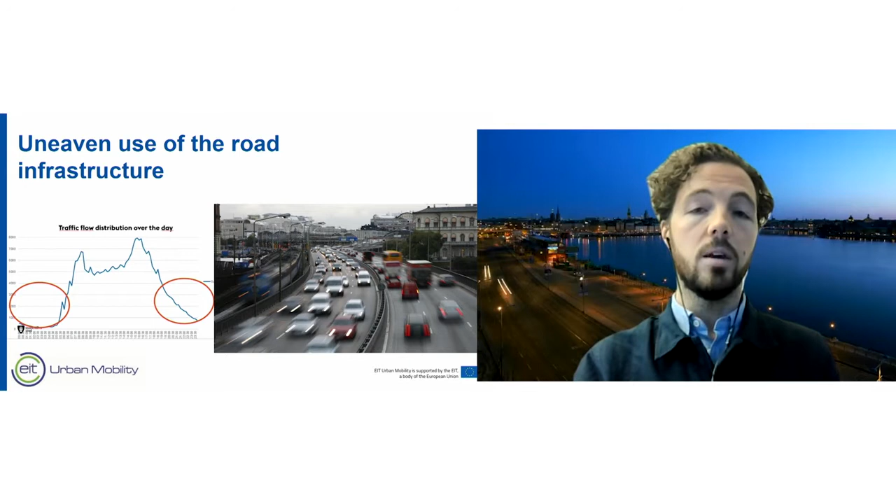So if we can find solutions to move part of the traffic from the peak to the off-peak, that is a very efficient way of using the existing infrastructure in our city.

And of course, as we've seen in projects and why we're working with this, is that we can achieve less congestion during the daytime, which means less emissions, both for the daytime traffic and the nighttime traffic. Improved road safety, if we can have less lorries moving around in the morning rush hour when we have a lot of pedestrians bicycling to work, that's of course a very good thing.

And also this allows for us to work for our overall goal to achieve a more attractive city. It's a very good thing if we can secure the transport availability and the transport of goods, but at the same time remove the visible appearance of the trucks for people moving around in the city.

Next slide, please. But of course, we have several challenges connected to off-peak deliveries, which you will hear more about in the following presentations. Perhaps the biggest one is the noise challenge, which is a little bit different in different countries, but most countries have some sort of noise regulation to secure a good environment for residents in the city.

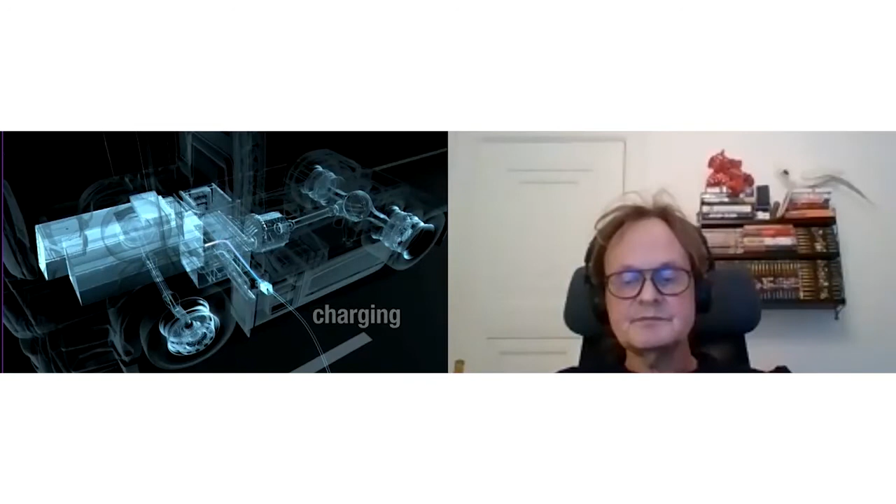I will come back to the plug-in hybrid in Stockholm later on. But this MAN vehicle can go 200 kilometers in range, and it takes about 60 minutes to charge in a 150 kilowatt charger.

The test was made in Munich, in a city, in a simulated route for a couple of weeks in November this year. We measured noise, and it was performed in 3 routes in the early morning, at 6 a.m. and at 10 a.m., and then also in 3 routes in the evening from 7 p.m. to 10 p.m.

The pilot in Stockholm with a plug-in hybrid has a quite small battery. This was the first prototype that Scania delivered in 2017 or 2018. It has a very small battery, it can only go 10 kilometers on electric, but on the other hand it's quite easy to charge, 15 to 20 minutes.

It is delivered to our logistic company, HAVI, who delivered in this test to 5 different McDonald's restaurants in Stockholm city. The plug-in hybrid is equipped with a geofencing device.

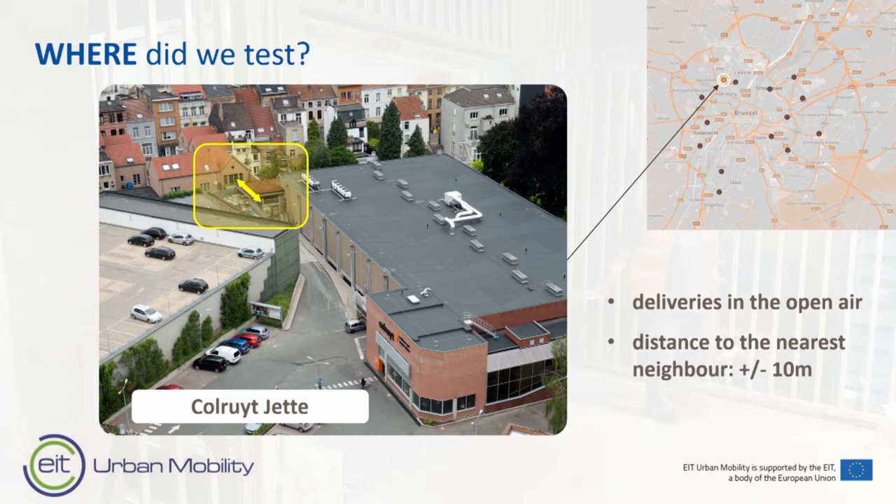This problem becomes immediately clear when we take a closer look at the test stores selected within the ZEUS project. The first test store selected within ZEUS was Colruyt Jette. As deliveries there take place in the open air, it represents more than half of the other Colruyt stores where we have more or less the same context. Since deliveries take place there at approximately 10 meters from the nearest neighbor, we only have a limited delivery window, which allows us at the moment to deliver between 7 and 21.

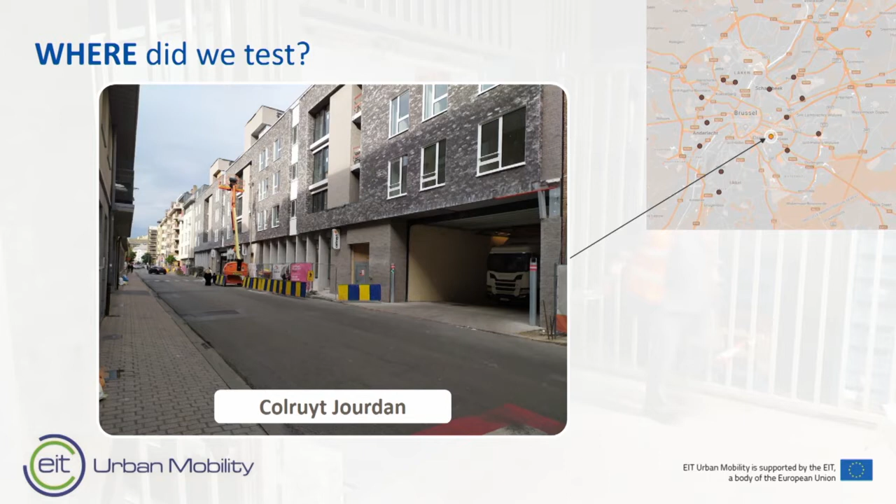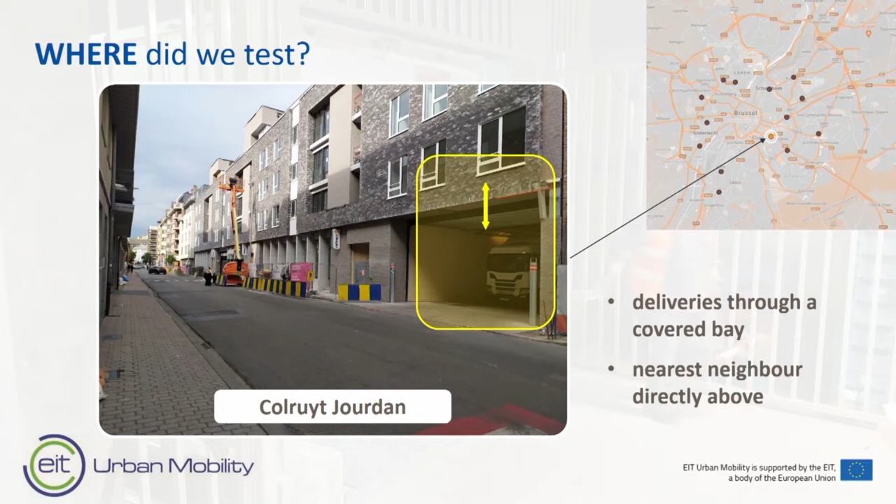Another store used within the ZEUS project is Colruyt Jourdan. Since there is a tendency among local authorities to allow the construction of a new store, or the renovation of an existing store, only if it is integrated in a multi-purpose construction project, it was obvious for us that we also needed to include such a store, in this case Colruyt Jourdan, in the ZEUS project. Deliveries there happen through a fully covered indoor unloading quay, which is covered from the street by means of a gate. But of course we have private residency just above the fully indoor unloading dock, which means there's also a real chance of noise nuisance for the nearest neighbors.

Now that we have had a close look at the test sites we used within the ZEUS project, we'll go through the materials which we have tested. Specifically regarding these materials, we turned to other industries. In fact, we didn't look at solutions which were already on the market for retail within a retail context, but we really turned to other industries.

For example, we turned to the chemical industry, which produces coatings, for example coatings which are for the moment mainly used in underground parking lots. We also turned to the construction industry, specifically for sound screens - I'll go a bit more into detail during the next slides. And we even turned to the shipping industry to use some fenders within the loading and unloading activities at Colruyt Group.

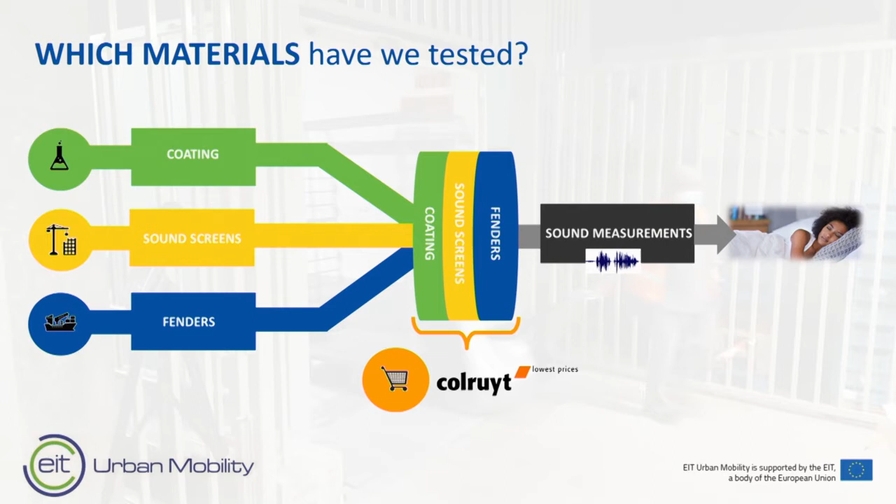In the middle of the screen, you see that all those solutions were eventually integrated within the retail context of Colruyt, so within the loading and unloading process specifically at Colruyt. For example, they were also combined with silent trailers, which we were already using in the past. The coating, for example, was implemented on the top side and the bottom side of the tailgate of two of our trucks. And of course, the ultimate objective of those measures is to result in reduced noise during off-peak hours, in order to ensure the good night's rest of the local residents.

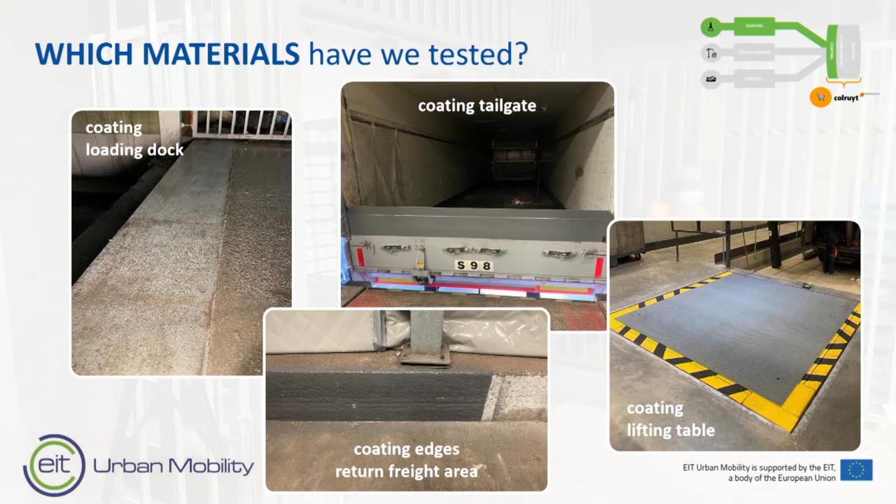I'll go quickly through some of the solutions. For example, on this screen you see the polyurea coating, which was not only applied at the tailgate of the trucks, as you see in the middle of the screen, but also on each of our loading and unloading infrastructures. On the left-hand side, you see the loading and unloading infrastructure at Jette, and on the right-hand side, you see the covering of the lifting table we have at Colruyt Jourdan.

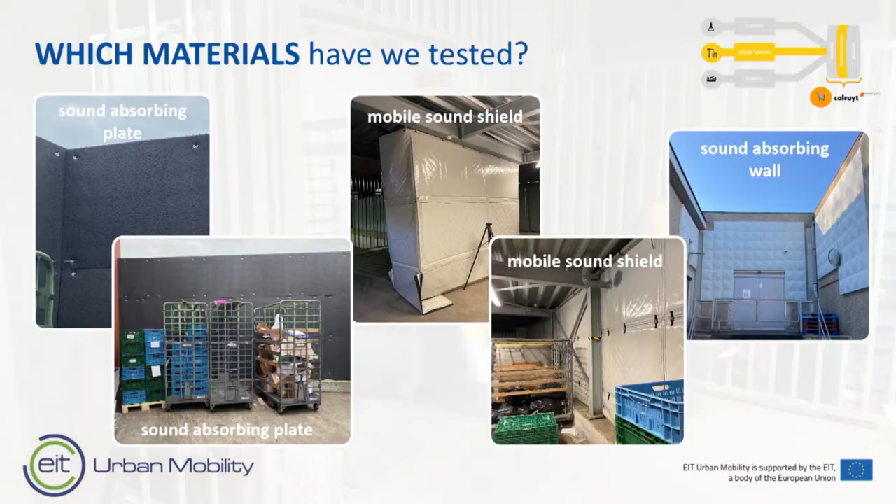As already mentioned, we also used some sound barriers or sound screens. Different types can be seen on the slideshow. On the left-hand side, you see the sound-absorbing panels, which are currently used in construction sites for the enclosement of soundproof compressors. In the middle of the screen, you see the mobile sound screens, which we used in Colruyt Jette. Those screens are used to cover construction sites or even festival grounds, and we use them in a Colruyt context to reduce noise for the nearest neighbors at Colruyt Jette. On the right-hand side, you see the sound-absorbing walls, which are currently mainly used in highway and railway contexts, again to reduce noise for the nearest neighbors.

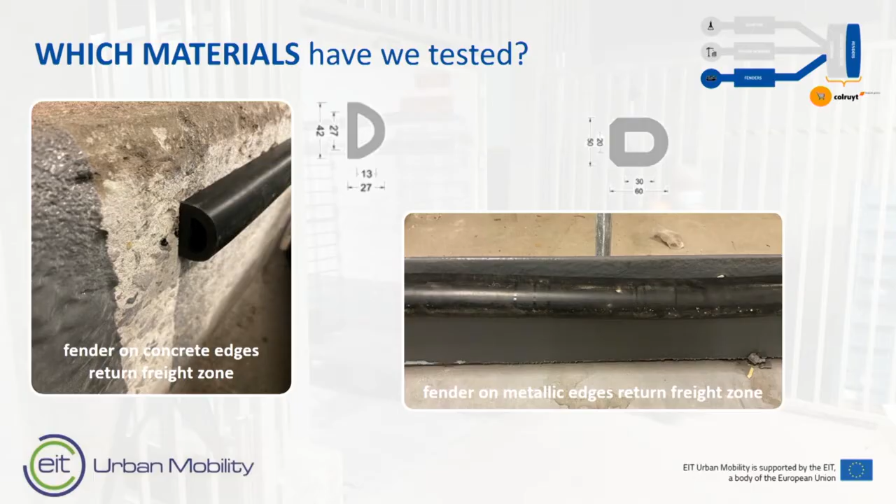Last but not least, we also tested some fenders. At first they seem like ordinary rubber bumpers, but in fact these are fenders used in shipping docks, because we already saw during previous projects at Colruyt Group that rubber fenders are not always durable enough to be used in a Colruyt context, which has heavy contact with hand pallet trucks and retail carriers.

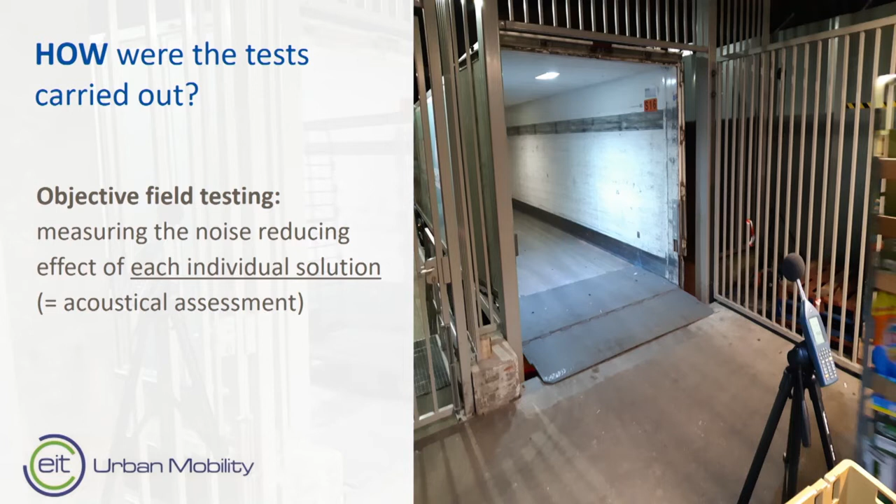The main objective during the project was to be able to measure the sound-reducing effect of each individual solution we tested. This has been accepted as a sort of acoustical assessment, but also every possible combination of the mentioned solutions has been tested within the ZEUS project. And for that, we focused on the two main critical points during loading and unloading operations.

Being the loading and unloading of the truck itself, specifically the passing of the tailgate with a combination of a hand pallet truck and retail carriers, and also the uncoupling and coupling of those retail carriers in the return freight zone at our stores.

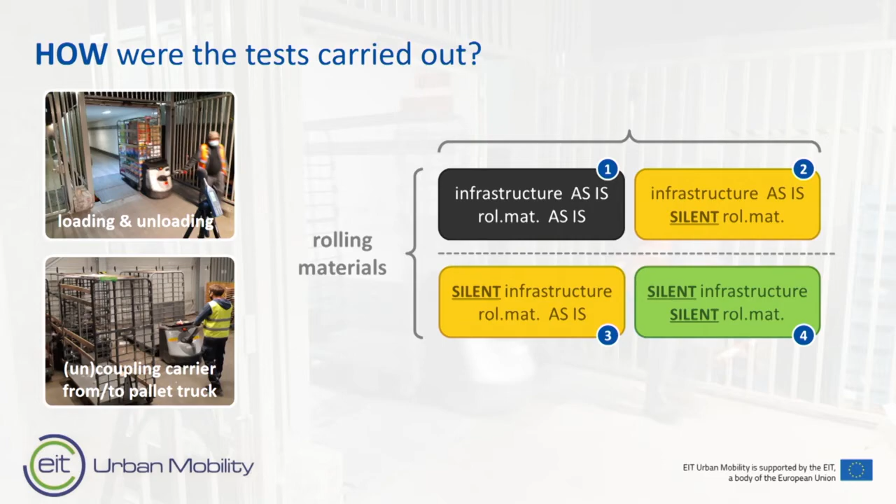And of course, we did some baseline tests in the first phase. In the second and third phase, you see that we managed to uncouple the infrastructural adaptations from the adaptations to our rolling materials, so we tested them separately during those phases. Only in the fourth phase did we test all of those solutions in one single testing environment, which should allow us to measure the sound-reducing effect of all materials together.

Last but not least, what are the preliminary conclusions for the moment? It's very important to have a clear view on the problems you want to tackle within a loading and unloading environment in a city context. So you have to be very well aware of the choice you make for sound-reducing materials.

The second conclusion follows from the first, as it has been concluded within the project that a mere accumulation of sound-reducing measures is not always resulting in the highest noise reduction. For example, if you put a coating on the loading/unloading floor and also on the bottom and top side of the truck's tailgate, this can actually result in a higher noise level than before, or even with one of those measures applied separately.

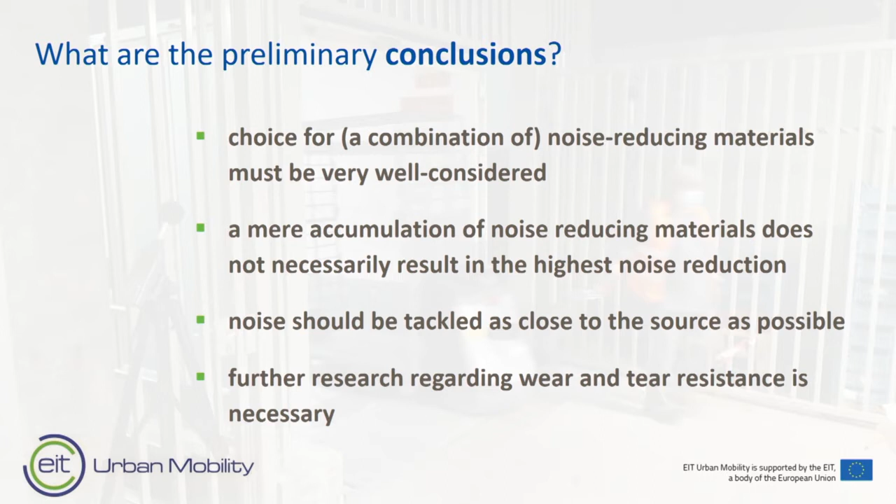It looks like I'm Shari, but I have to disappoint you—Shari will be the next person. Just to announce her properly: I'm very honored to have a PhD researcher of the University of Brussels amongst us as well. She knows all about the added value of stakeholder analysis and how their tool, MAMCA, can help with this process. Mrs. Heunings, the floor is yours. Did I say Mr.? It will be quite sure that it's not Mr., it's Mrs. Okay, thank you, Koen.

All right, let's dive into the social aspect then, because that's a task that was assigned to the Brussels University. When we take a look at all the tests that are being performed and all the models that are being set up, we see that each of these tests focuses on one of the components of a measure. For example, what is the effect on congestion, on costs, on emissions reduction, etc.

Now, what we do as VUB, we have developed a methodology called MAMCA that brings all these components together and also adds a social aspect. It looks at what is important for each of the people that are impacted by these measures, which of these components is the most important for them.

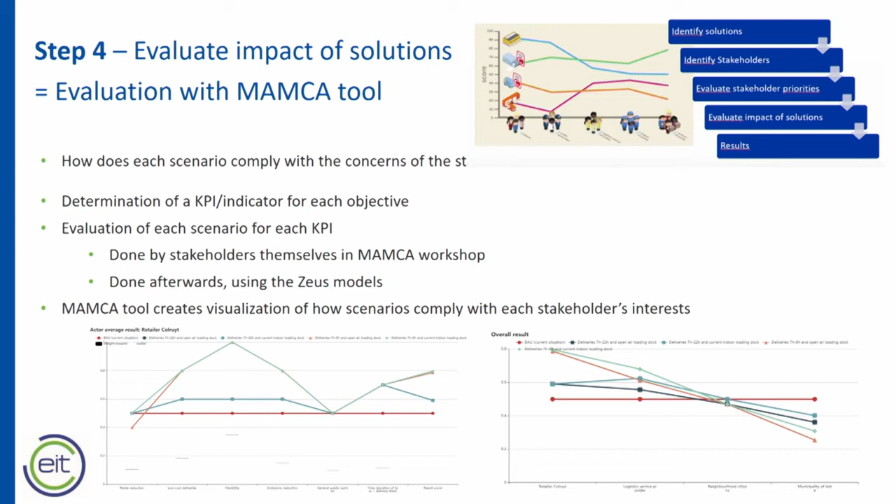I'll go more into detail later, but just to show it, that looks like this. These graphs show for each of the stakeholders which is a preferred solution, preferred scenario based on their objectives.

I told you there are 2 ways to do this. The first one is you let the stakeholders evaluate it themselves. The second one is you use models or data input you get from test cases to actually do the evaluation on a more scientific or mathematical basis.

So to make it a bit more clear, we tested this out for the Colruyt case that Dries just explained. And we went through all the steps for one of the cases from Colruyt.

First one, the scenario building. We asked ourselves, what is important? What do we want to test out in this case? Here it was, we want to see what's the stakeholder acceptance for the use of silent equipment in two different contexts, Jette et Jourdan, with an uncovered bay and a covered bay, and also of the extension of the delivery window. And it gave us 5 different scenarios.

The first one is the business as usual, which is, let's say we do nothing, we just keep on going as we do today, for comparison reasons. Then we have 2 scenarios with an extended delivery window, but only by an hour, like deliveries until 10 o'clock at night, in the 2 different contexts with an uncovered bay and a covered bay. The next 2 scenarios are a much more extended delivery window until midnight, again with an uncovered and a covered bay. So those are the 5 scenarios.

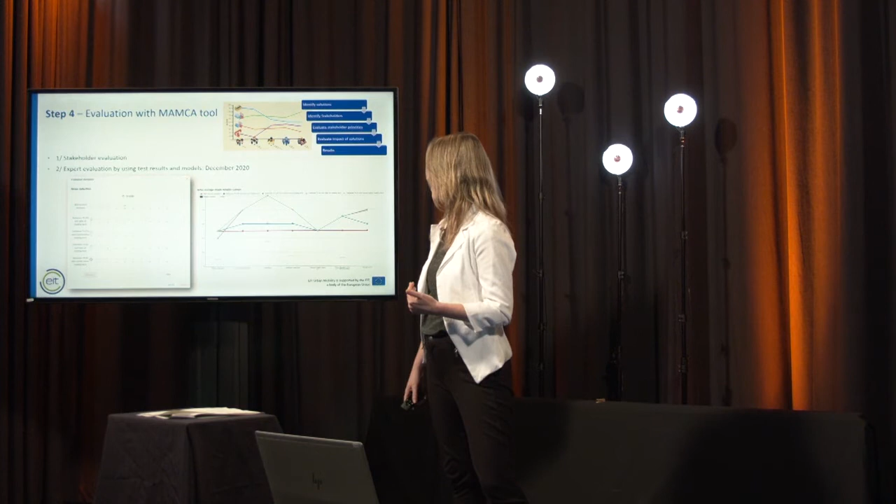How come? Well, we see that these two scenarios score very well on the objectives of duration of the tour and flexibility, and therefore create a good end result. Why do they score good on that? Because if your delivery window is larger, you have a more flexible schedule, you can avoid congestion more, etc. The only aspect on which it scores less than the business as usual scenario, the red one, is noise reduction.

This scoring is done by the stakeholders themselves, but once we get all the test results in and all the models are ready, we can do this scoring based on those things. So for example, the objectives noise reduction, low-cost deliveries, emissions reduction, etc., can be actually evaluated based on the models that we have.

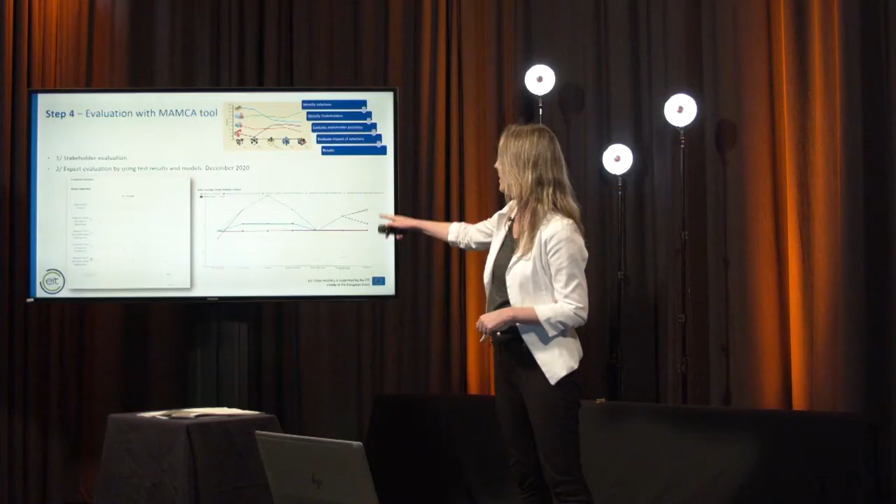Now we've done this for each of the stakeholders. We've taken these results, and that gives us an end result where we see, again in the colored lines, the different scenarios, and on the bottom the different stakeholders. This is their result. First of all, we see that there's not one scenario that scores best for all the stakeholders. There's a lot of difference. What we do see is that the covered versus uncovered bay also gives a different result.

For example, the green and the orange one. The green is the covered bay and the orange is the uncovered bay. With the blue ones, the light blue is the covered and the dark blue is the uncovered bay. We see that the acceptance is a little bit higher for cases where you work with a covered bay.

And then we see that for the retailer and the logistics service provider, there's a clear preference for the extended delivery window, whereas that is the least preferred option for the municipality and for the neighborhood citizens.

Now, we talked about this with them. We went into detail to see where this result comes from. And then we see that actually this most extended window scenario scores best on things like emission, congestion, safety, etc., which is also important for them. But the only reason it scores less overall is because of the noise.

So we knew beforehand for this project, those two said no, we can't support the extended window of delivery. But by looking into the details, we saw that they realized it also has some advantages, this extended window. The only problem is probably with the noise. And the way we perceive it now is that these will produce a lot more noise. So if the tests can show that the extra noise production is, in fact, limited, then they could support this scenario. Or, when it shows that there is indeed extra noise production, the only way for them to support an extended delivery window is when added measures are taken to reduce this noise.

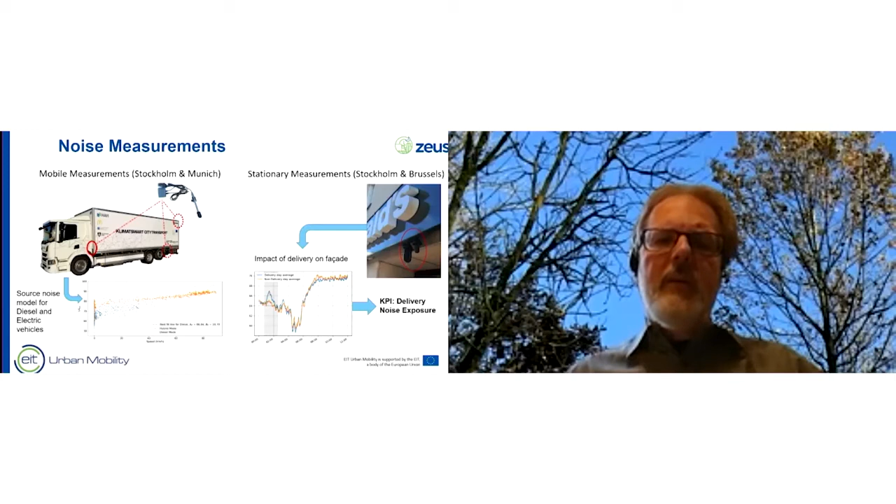And as you can see in the figure, these noise levels are overlapping and in the end influencing each other with regard to the activities when unloading at a certain location.

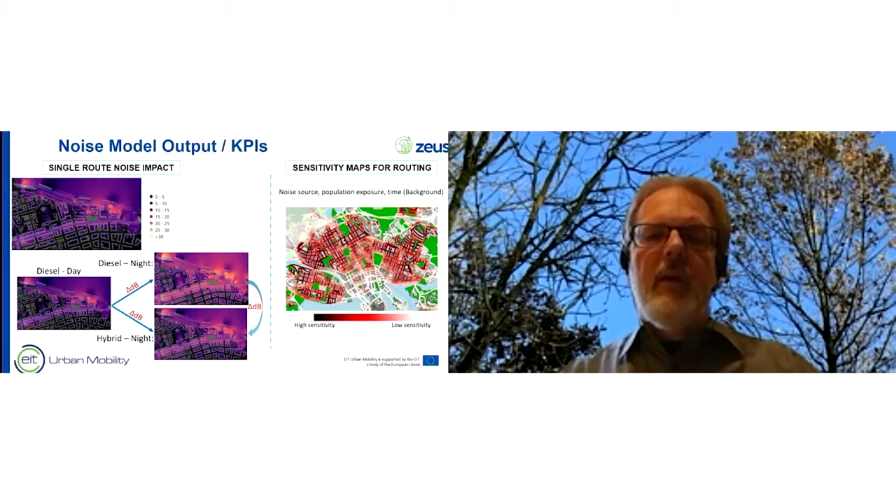There's much less influence on noise than with a diesel truck at night.

The third model to have a look on is the transport efficiency model. With this model, an assessment of effects with regard to duration of routes, best taken routes, fuel consumption, etc., can be done and evaluated in manifold ways.

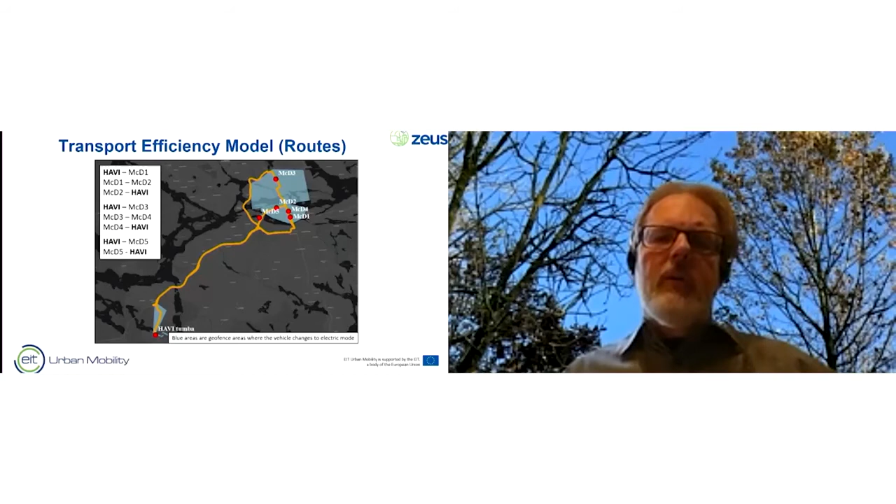This has been done especially for Stockholm and the case Magnus described in the beginning, the deliveries to HAVI, to McDonald's locations done by HAVI, and with the model, different alternatives could be taken.

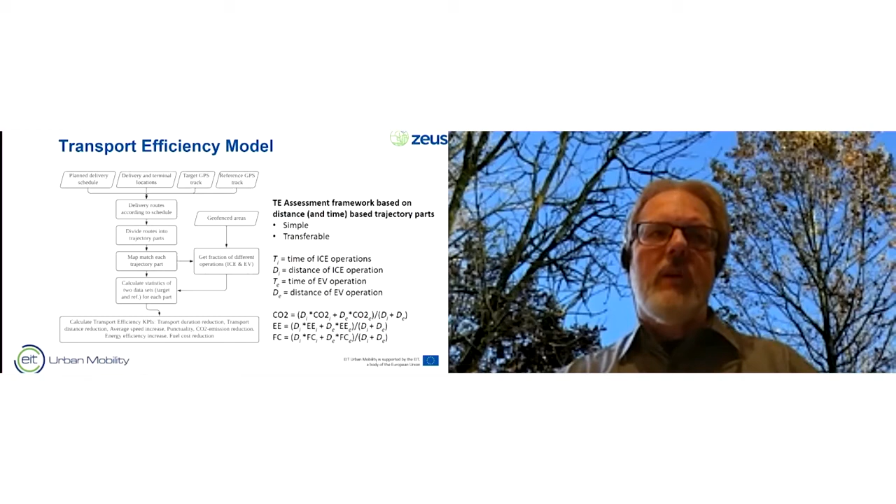In the end, this transport efficiency model presents a lot of assessments, and by this, different kinds of transports can be validated and compared with each other, and the most effective way can be shown with regard to the HAVI McDonald's case. It could be shown that there are a lot of improvements that can be done, and under certain specific conditions there may be no efficient way to do off-peak delivery, but mostly there are a lot of effects in positive ways, and even effects of a city change in street use could be shown by this model.

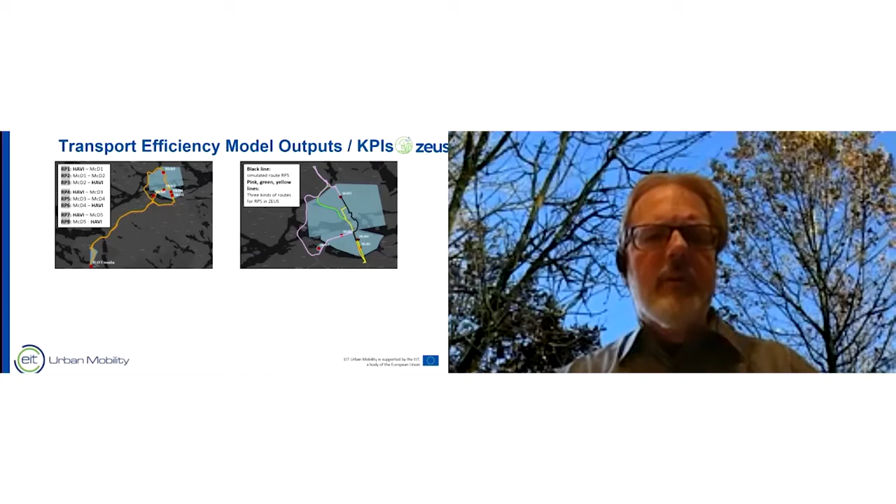So just a rough step through different scenarios. As I said before, there were a lot of analyses and comparisons over the day and over the night delivery.

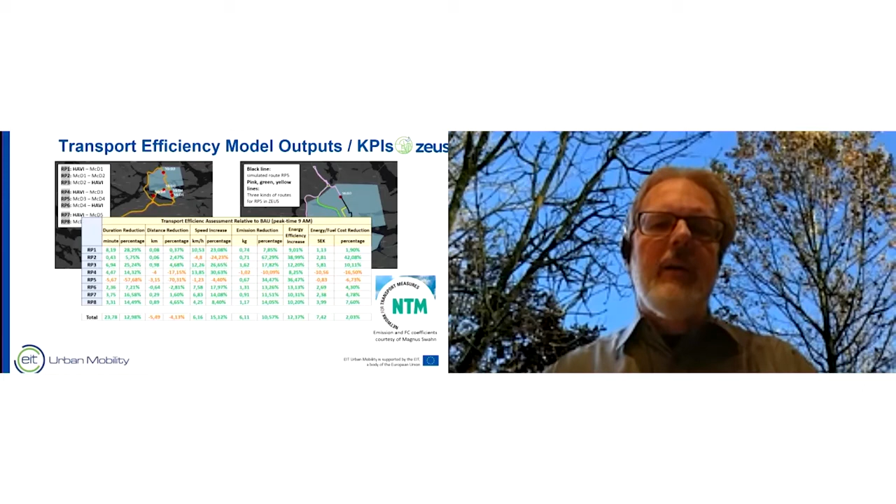With regard to the effects, most of the time, and you see the green numbers in the figure, have shown that there is a positive effect, and as said, under specific conditions the effects with regard to all these different aspects that have been covered by assessment are worse, but in the end it's a valid contribution to decision making and get valuable KPIs for further models.

The fourth model, and yes, thanks for stepping, and just one more click.

Silent routing is especially having a look on how to do routing with regard to avoidance of disturbance. On the one hand, specific facilities like kindergarten, hospitals, schools, etc., shall be avoided. But on the other hand, and this is a valid input of the noise model with regard to noise levels and noise sensitivity, this routing is done.

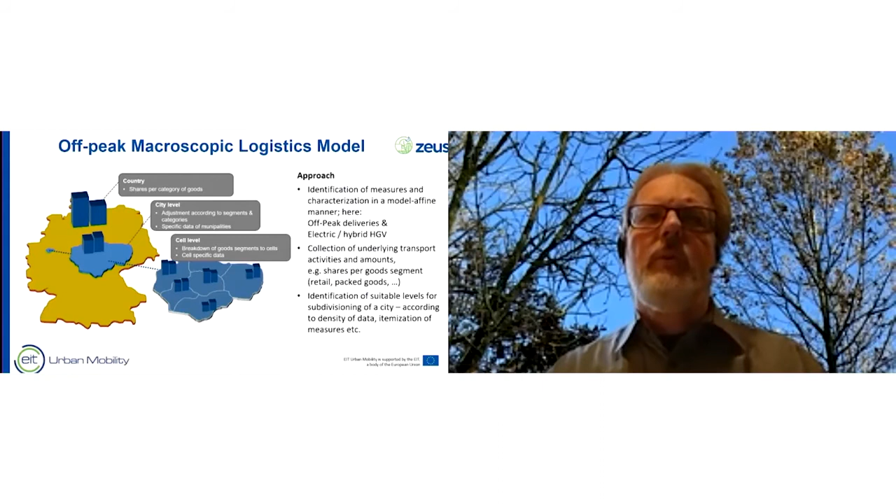So like I said, this is quite an initial step to make a decision whether it can be, in general, sensible to do such a project like off-peak delivery.

And like presented by Sherry, the MAMCA tool is also a very important step in this whole scenario of different models. Impacts of the business model are short-term, in that there are some revenues, but the cost structure will be impacted in a negative way, in a sense. But in the end, there are a lot of positive effects and KPIs that can be shown that have positive effects on the outcome of such a transfer for a transport buyer with regard to off-peak deliveries, like done in the US.